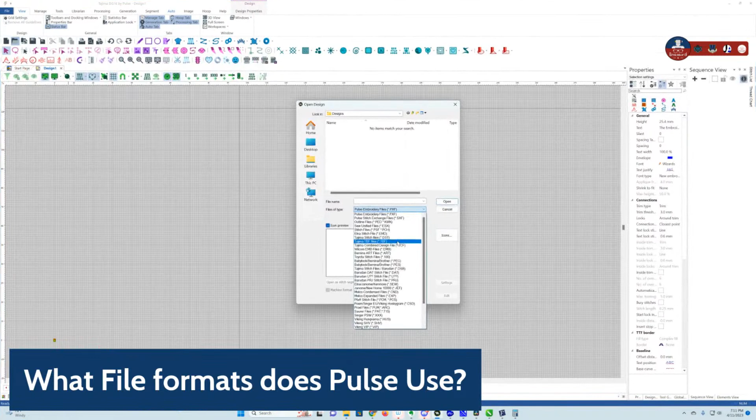Let's talk about the different file formats, and the difference between a native format and a machine format that you can open. If we go into Pulse and hit the open key, we have PXF, and there used to be POF, and we have SXF. This is going to be hard for me to pronounce. We have our native files here, and then we've got outline files: SO files, stitch files, machine files, DST, PES, and the like.

We can open up any of those file types, but the files we want to make sure we're saving in are our native format. For Pulse, that's PXF. For Wilcom, it's EMB. For Ricoma software, it's .RDE. Melco is OFM. Floriani's is .WAF. And Brilliance is .BE.

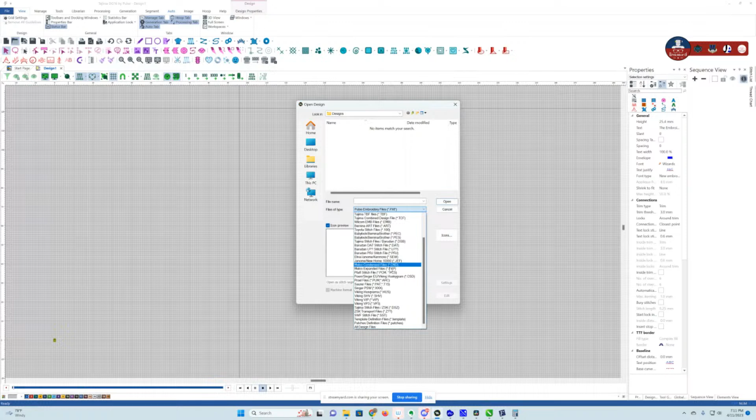You want to make sure that when you're digitizing, you're saving your files in your native format, because sometimes when you're working in a file, things change. Let me just draw something so there's context here. And let me make sure I spell it right — I'm not going to have my business card accident all over again.

Oh, you mean where you spelled embroidery wrong in your business title? Yeah, and nobody recognized it forever. Embroidery is a hard word to spell, though. I know, right? Everyone's spelled it wrong.

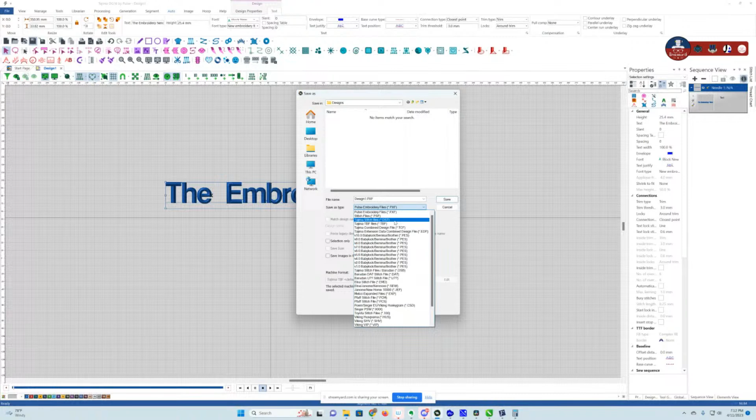Right now it's going to be saved as design1.pxf. If I go in here and save it as a DST — it's on the list, I swear, right there — if I save it as design1.DST and continue to save it, you would hope that it would save as a PXF, but actually it doesn't.

If I save this as a DST, it's always going to format to a DST. I know there are a few other softwares like that. I'm just going to do all design — so you can see design1.dst. There are a few softwares out there where if you save your file format as a non-native format, such as a stitch file, then every time you hit the save icon, it's going to save it as a stitch file. It's just going to re-export that stitch file, and that's not necessarily what you want.

You want to make sure that when you are saving your designs, you save them properly — you can always go to File, Save As, and choose PXF. There we go, we'll go ahead and save that there.

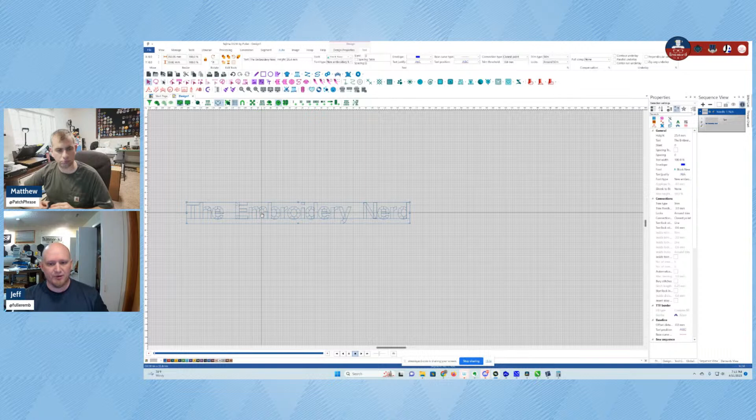The reason is the PXF file is an object file. What I mean by object file is that if we turn off the 3D view and the stitches view, you can see we have object outlines. These object outlines are basically the boundaries — you can see these lines here, which are angles of inclination and our stitch angle lines.

Every time we make a change to one of these objects, the stitches that cover it are regenerated. So if we turn our stitches back on and move this, our target density is always going to stay at 0.4 — that's what it's sitting at.

Now I can do something here that'll basically turn it into a process — I want to go outline to stitch segments. So now I've basically made this like it's a machine file.

If we go to scale a machine file, what happens is our target density is not preserved and our stitches open up. And that can cause a problem when you're trying to resize or change a design. So when you purchase a design that's a DST file or any type of machine file, when you get into resizing, there's kind of an unwritten rule.

The unwritten rule is that you can roughly resize it by about 10%, which means if it's at a target 0.4 density and you resize it, you're going to go down to approximately a 0.35-ish density. And if you scale it up, you're going to go anywhere from 0.45 to 0.5 density based on the 10%. Now when you're scaling up, it can cause issues with show through where you can see the fabric coming through.

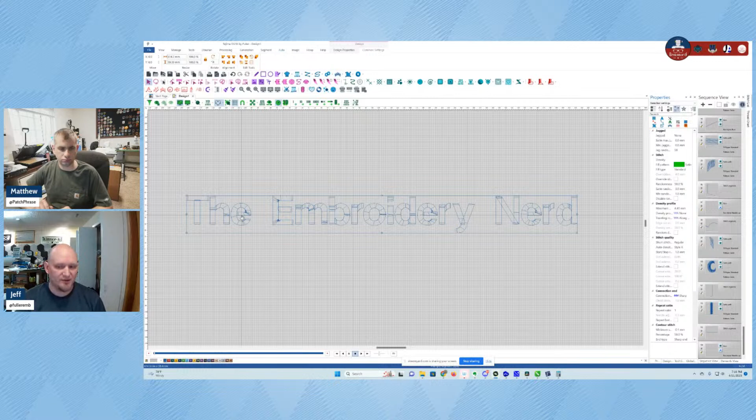Because I've preserved this as stitches, I can go in here to process, and I can do stitches to outline. So basically I told it—now I can remove the stitches there—and I told it that I want it to try and figure out the outline and the angles and inclination by itself, so then I'm able to edit it further like it's a native object.

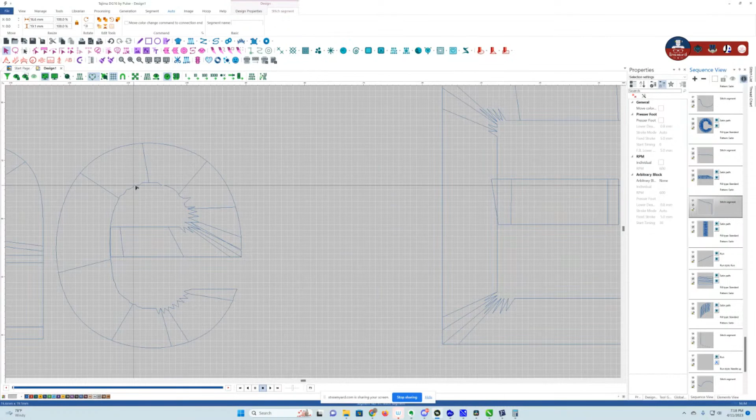Now you can see here that I have a lot of objects here. And some of the travel runs that it had in there are now individual runs instead of being part of the object, which is what it was. And you can also see here, if we come down here, it got a little bit choppy on the inside, not a completely nice smooth object like it was when we started.

Let me turn that on, and we'll get back to object. So you can see how it's not a completely smooth object like it was before. When you're drawing objects, you really want them to be in the smaller, lower node area. The lower nodes that you have, the less decision points the software has to make, and the smoother it can draw those lines going back and forth.

But let's grab a couple of comments here. I can see we've got Suzanne joining us from Rhode Island. It's going to take me a minute today—it's been a long day. We have Barb LaFawn, who has a lot of software too, and I can relate. I have a lot of software too.

Gina says, great illustration chart. I've likened resizing DST to resizing in Photoshop. The software will do what it can to fill in. That's what really comes into play when you're doing this, you want to try and make sure it's going to run the smoothest that it can. Sometimes editing a DST file isn't going to give you the best outcome you could hope for.

Now, if you're using software that your digitizer doesn't use, or your digitizer doesn't give out native files, it's easier to go back to them and request an edit, especially if you need a really large change. It's going to be better if they make that edit in the native software for scalability, especially with a size change. They'll also be able to look at things like whether your columns are going to be wide enough or too short.

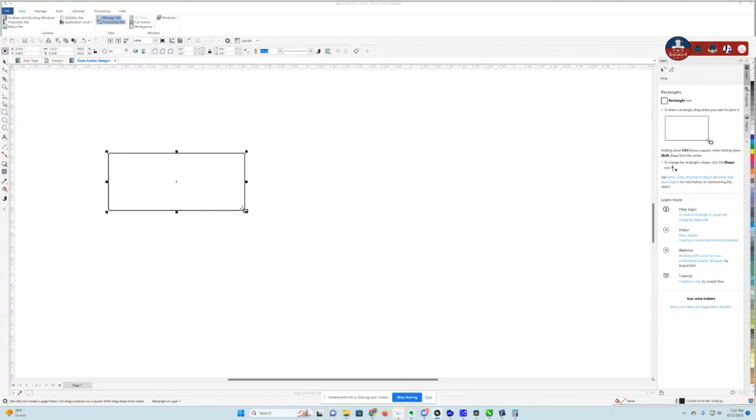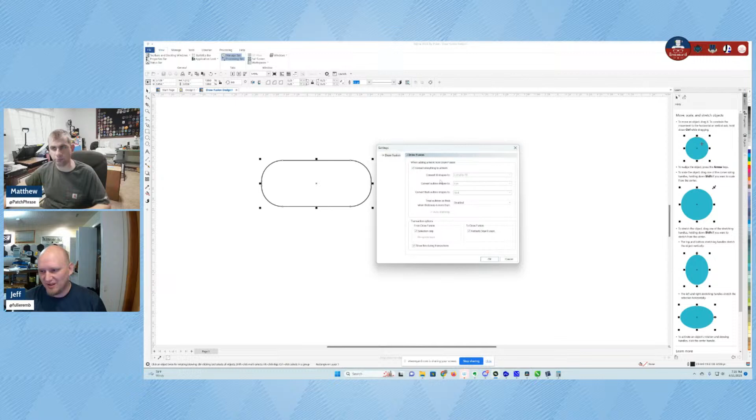And you have to go to the full version of Corel to be able to edit all those things. So personally, I will import and use the artwork in Corel, make any changes I need to, and then bring it into Pulse to make the changes I want. That's generally how I do it, and it's worked out well so far. So yeah, you can do that, and then if I want to convert everything to artwork, I can. I can uncheck that, but we can go ahead and close this out.

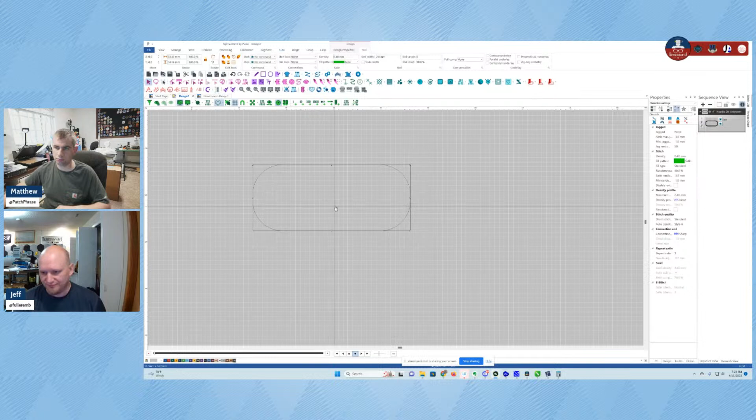Now it's going to bring our artwork in here inside of Pulse, and we can right click on it and convert the segment to any one of our major object types. Let's see if it's going to work. Convert segment to, I want it to go to a satin, and it doesn't want to work. We'll go to a complex fill. Complex fill, and there we go, I can set my angle. Oh yeah, you know what the problem is? I got to turn that on.

I'm like, why can't we see the stitches? It's because I turned the stitches off, so we can go back to that, and now we have that option. It's one of the easier ways to get some of your shapes.

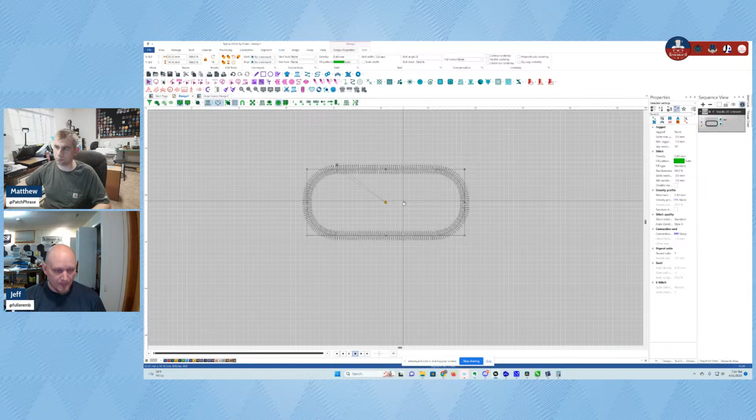When using Pulse, I like to draw the artwork first and then move into assigning it stitch shapes and inclination lines. I've actually started doing that in Wilcom as well. I'm starting to work more artwork oriented and then assigning stitch properties instead of trying to do all of it at once. I found I can get a lot cleaner objects with fewer nodes if I do the artwork first and then go into the digitizing. That's one of the ways I've changed how I work since starting Pulse, and it's worked out really well for me so far.

But that's how you would import an object, an artwork, or a graphic of any sort. You would go through, and... my brain just went blank, Matt.

Ugh, alright, so let's go to the next one. Yep, let's go to the next one. Well, do we have any comments we want to bring up? Oh, okay, nope, I lost my sheet. Where'd my sheet go?

Okay, so do you have a design available to show? Hold please. Alright, so this question is going to be: how can you use the software to simulate the final embroidered result?

And what factors should you consider when evaluating the design's appearance? We did a live session a couple weeks ago on how to do a mock-up of the design on a hat or something. Yep, we did. Some other software has TrueView, Stitch View, and all that. Can we demonstrate that a little bit on here?

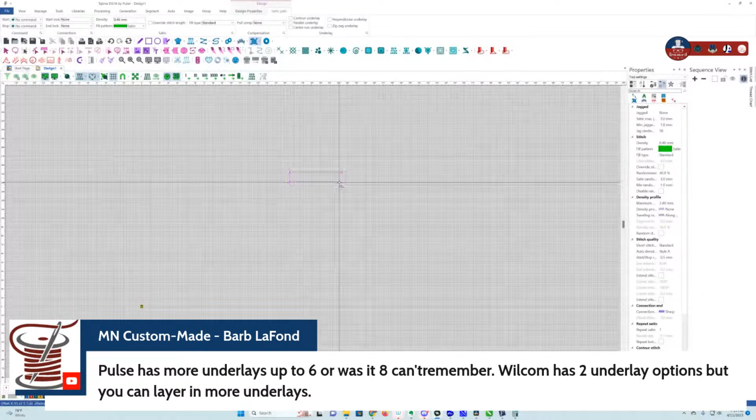It's bad when you don't even look at your scale. But I didn't look at the scale, so I don't know how it compares. We're not embroidering it, so it could be way too big here. Oh, wrong button.

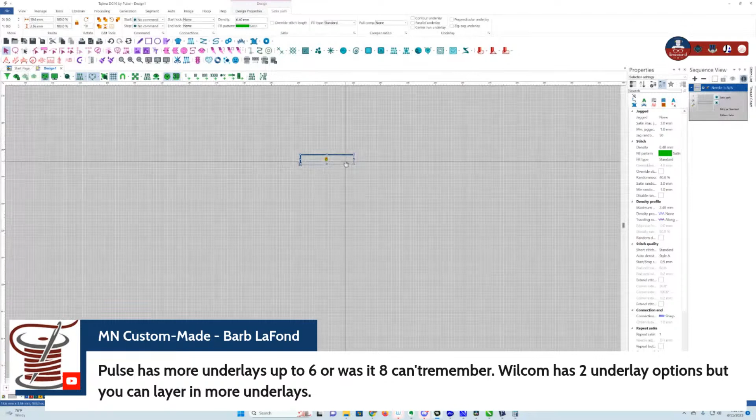Probably way too big, still way too big. Let's keep bringing it down. Let's just delete it and zoom in here. I'll do this one. Wrong button.

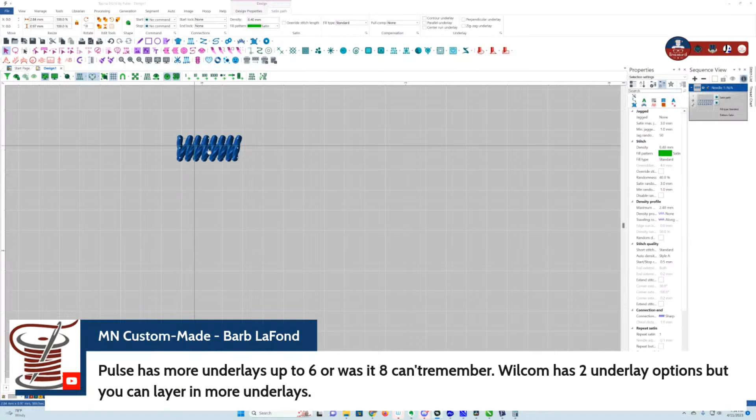So now we've got our stitches. We can go into the underlays. We have 3, 4, 5 underlays here, and if you want to, you can specify the underlay order. We can pull up our advanced properties box. Here we go, and we can set our values here. So I can do the zigzag, parallel, perpendicular, and contour.

I can set the sequence number if I want to, which is really nice. So if I check 2 of these and tell it not to use a default sequence, I can tell it what sequence I want it to sew in, which is nice when you want to move from, let's say, a perpendicular first, or an edge run first, or tatami first. I can do those here, or they call it a mesh, and I can change that around.

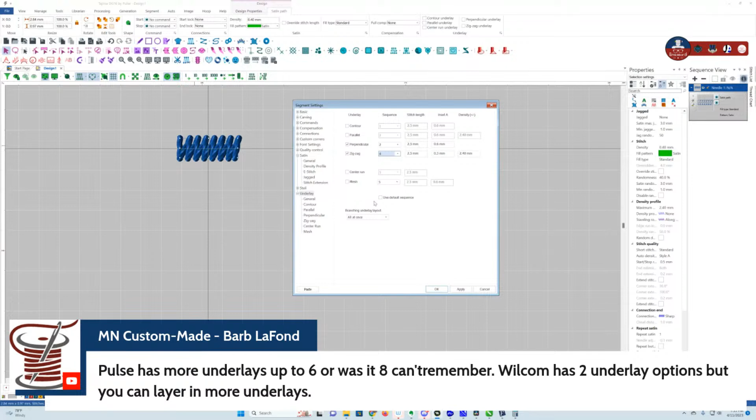If you make a change before you digitize an object, it's going to apply from that point on. Or if you have an object selected and you make the changes, it's only going to apply to that one object. So it looks like it has 6, 1, 5, 6, and I can apply all of them.

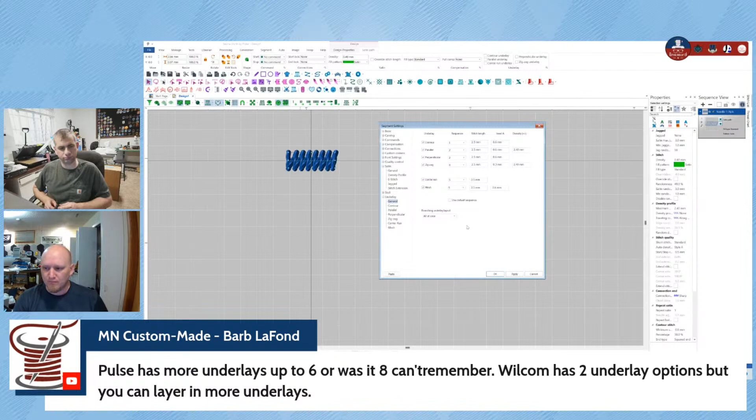I can apply all of them. I don't know any point you would, but sometimes I've run into a thing where I would like to run one more than I have available, and then I have to manually digitize it. Here I can add those in. You can go in here and change your stitch length, your inset, your densities. Just depends on how you want to run it. But it's one of those things I've found that I use.

And of course, if we turn off our 3D view, you can see we have a lot of underlay in there.

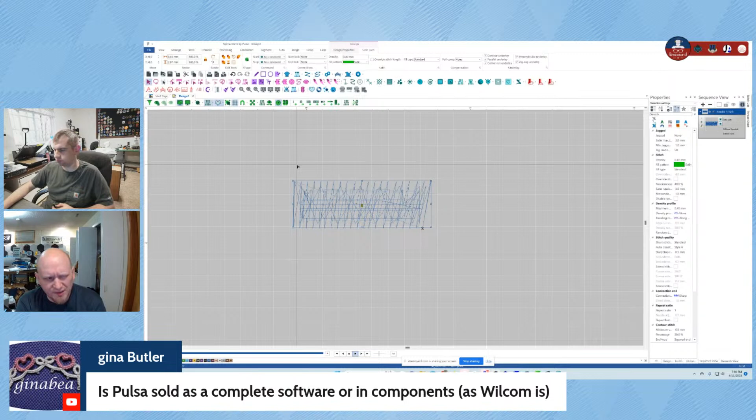Gina asked, is Pulse sold as a complete software or in components like Wilcom is? Wilcom sells in levels, and Pulse also sells in levels. From what I understand and how I've seen it priced, Pulse doesn't have elements you can add on to increase your level. You basically buy the level and it has everything included. If you want more features, you have to buy the next level.

Maestro: I think it's kind of similar to how Wilcom does Embroidery Studio. You have your Deco Light, that would be the lowest level, the component, and then you keep going up to a different level. And once you hit, was the digitizing the one that we have? The big one? I think it is.

Yep, once you hit digitizing with Wilcom, you have to pay that get-in-the-door fee, and then pay for each component. With Pulse, you just pay for which step you're on and you get everything. So you don't have to pay a couple thousand dollars for a car and then pay $400 for a wheel and a steering wheel and stuff like that. You just get the whole car, all the luxury items with it.

Not everybody needs the Maestro level, they can go with less. I see Identity Threads uses the Artist Plus level. You can do a lot of things in those different levels without purchasing new elements. With Maestro, I can run a borer, run sequins, run beads. I don't necessarily need to run those things. So based on the machine you buy, you might look at different levels.

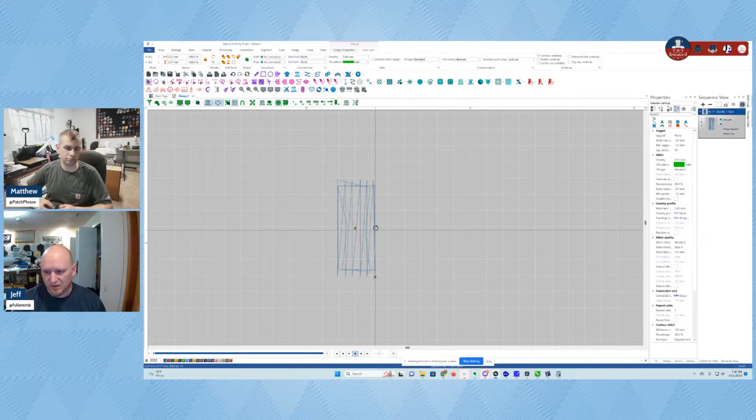Let me figure this out—I've been digitizing in more than one software today, so all my shortcut keys are messed up in my brain. But we can take this object and look at it, and go, okay, well what they're using for that material is... there we go, looks like an edge run and a parallel underlay.

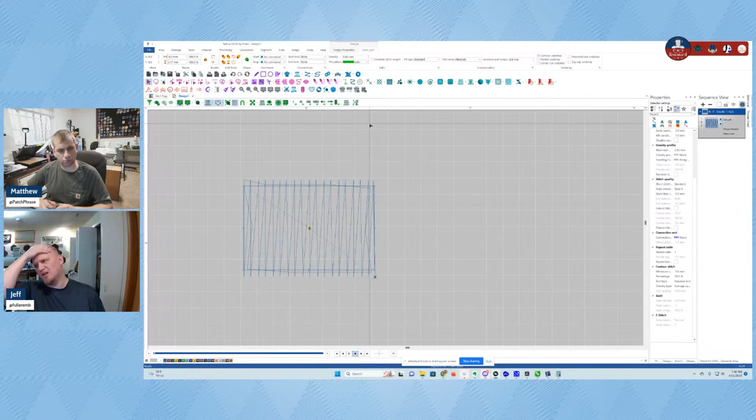Let's pull this up, because we can just look over here—that's the easiest way. So they're actually using just a contour underlay, not a parallel underlay, and that's what they're picking. And again, that decision depends not only on the type of object, but the size of the object too. If you have a larger object, that's going to change.

Our density sitting here right now is at 0.45, where standard density would be 0.4. Depending on what you're going on—like if you're going on a hat, I'd drop down to 0.35. Let's find out what happens if we go here and change it. You can see I've got my density there, but if we go down to the design properties, let's see what happens if we change it back to normal and presets to basic.

As you can see, it doesn't look like that change applied. But if you make that change before you start digitizing, then that's going to be your object's properties that you'll be able to utilize throughout the whole design.

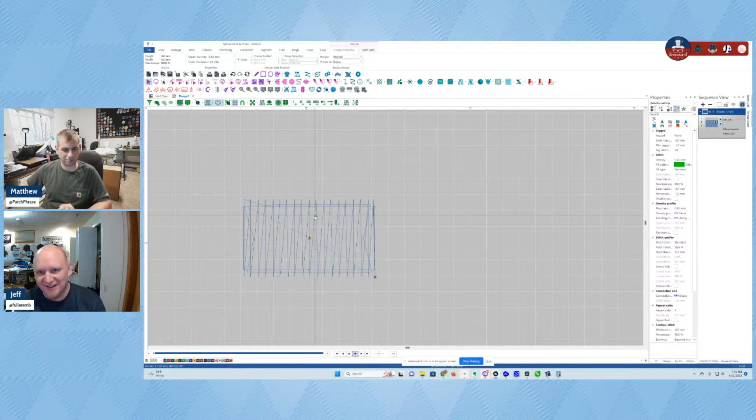If that doesn't make sense, let me know—it's been one of those days. Sometimes I think a lot of the stuff coming out of my mouth doesn't make a lot of sense.

But we can also account for density based on the item it is, and we can actually input the fabric thickness in here. So if we have a measurement of how thick the fabric is going to be, it's going to help use that to estimate how much pull comp it's going to need.

One of the other unique things you can do in Pulse is not only edit for pull compensation, but also edit your satins for push compensation. It's not something I use when doing text, because if you have an O, which is a closed object, and you put a push compensation on it, it's actually going to apply the push compensation where those two objects meet, which isn't necessarily what you want. But if you're using a standard I, it's going to give you the push compensation in an I.

I will try not to forget the question I just had pulled up. Okay, yeah, it was...

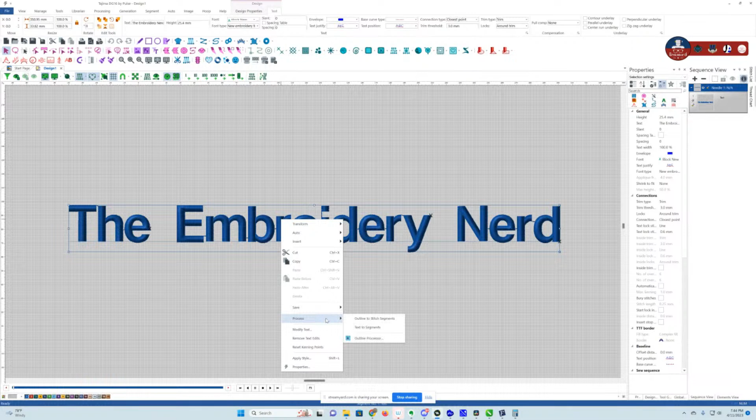Process - so I've processed from outline to stitch segments. Then I can go ahead and process and do stitches to artwork, and that's going to bring it into the artwork. That's actually how we did the shirt design last week.

But using process, if I want to go text to segments, I can convert that text segments into artwork, into an art segment. Now I'm running, this is going to be an SVG - you can see that they're outline files. So if I wanted to pull them into something, we could do that, or I can change the fabric.

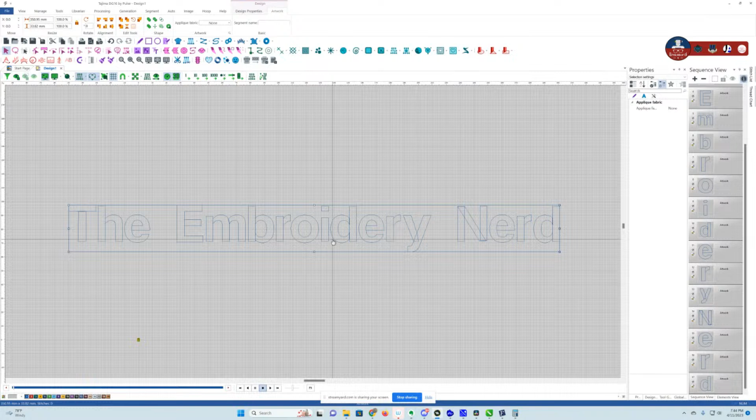But ultimately, I'm able to export these - I can save it as a CDR, an SVG, an AI, and now I can pull it over into my cutter file, which is going to be good.

Transform shape auto, there we go. Convert segment to, and then I can pull it back up to satin path if I want to, which it's going to want me to input the angle line, so it's going to come out weird like that.

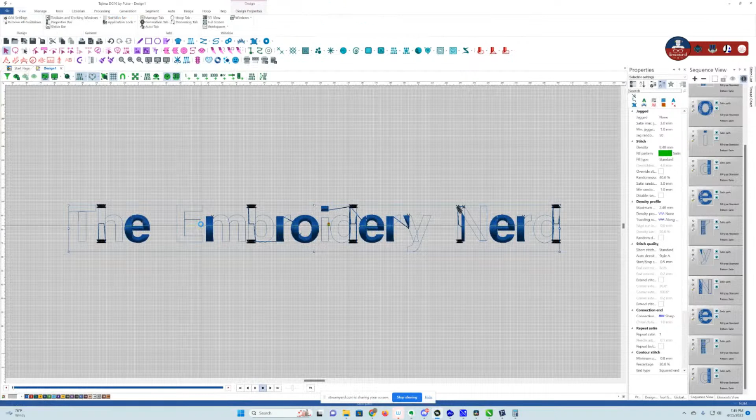Generally, when I modify text in this fashion, I'll pull it into a new file, not just text - when I modify something like that, I'll do the artwork modifications there so that I can export it from there. That way I'm not messing with my native file, because you want to make sure you're keeping your native objects as native objects as long as you possibly can.

So we've got that. Now, just checking there for questions, and I don't see any.